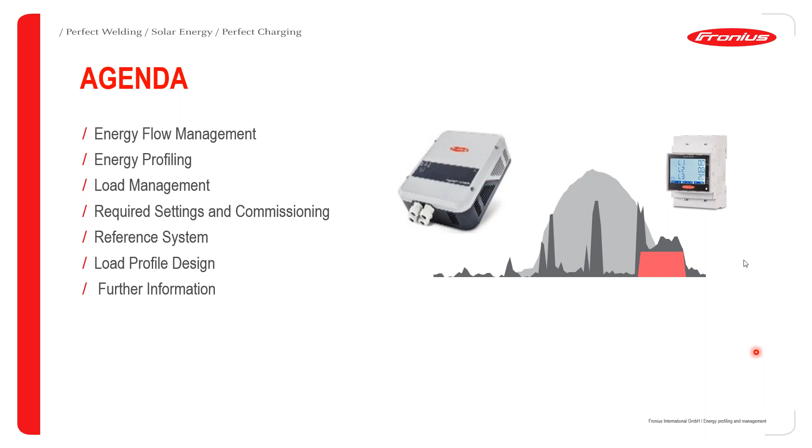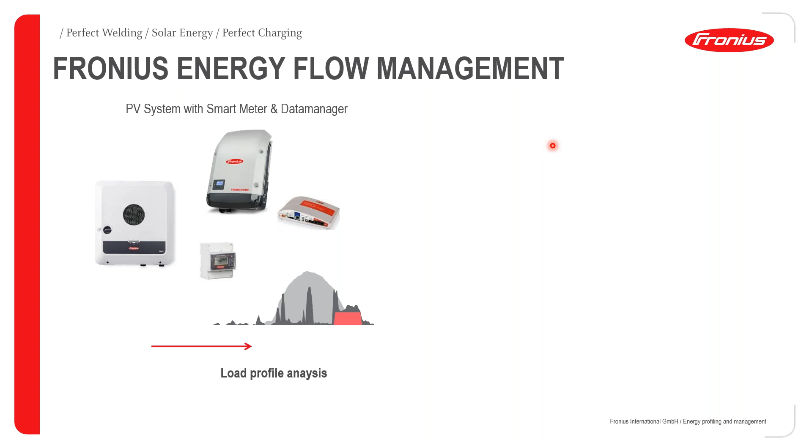Let's get started and look at energy flow management. So from the Fronius perspective, we start, of course, with a PV system that has a smart meter and a data manager, because these are the key requirements for you to be able to do load profile analysis. So the next step would be, of course, to be able to control heavy loads that might be connected or consuming energy in your system. And therefore, we go into the area of load management.

And after that, we also advance into an area whereby not only managing these loads, but also storing a bit of the energy for later use. And this storage can either be in the form of a battery storage or in the form of hot water. So the hot water and the battery storage are, of course, sections that can be covered entirely in different trainings. But for hot water, we go through the Ohmpilot. And for battery storage, at the moment, we are working in conjunction with BYD HVS, HVM batteries, as well as the Fronius GEN24 Plus hybrid inverter.

So therefore, this gives us an illustration of how this Fronius energy flow management can happen, starting with your generation, and then you go on to Solar.web and analyze how the energy flow is happening with your system, and therefore looking at load management and saving of energy, how this therefore can be optimized.

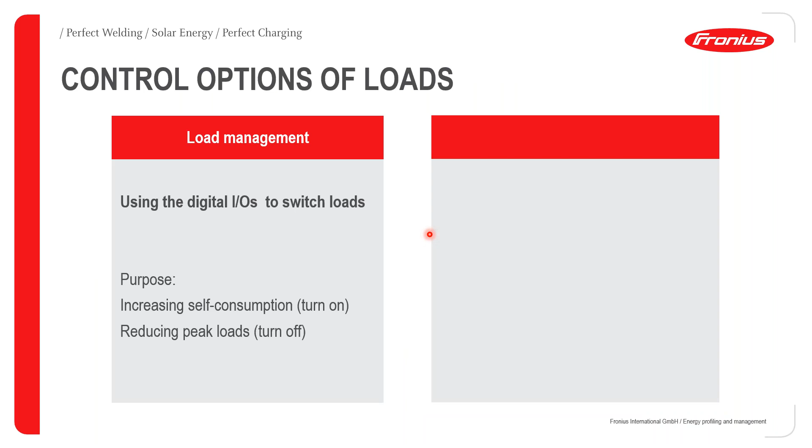In terms of the control options for the various loads, we have two possibilities. So we have one that is geared purely towards load management, and this can be achieved using the digital IOs to switch on the loads. And the key target here would be to increase the self-consumption level, and therefore you turn on this load, or you reduce the peak loads by turning off some specific loads that would cause your energy or power consumption to peak unnecessarily at some point.

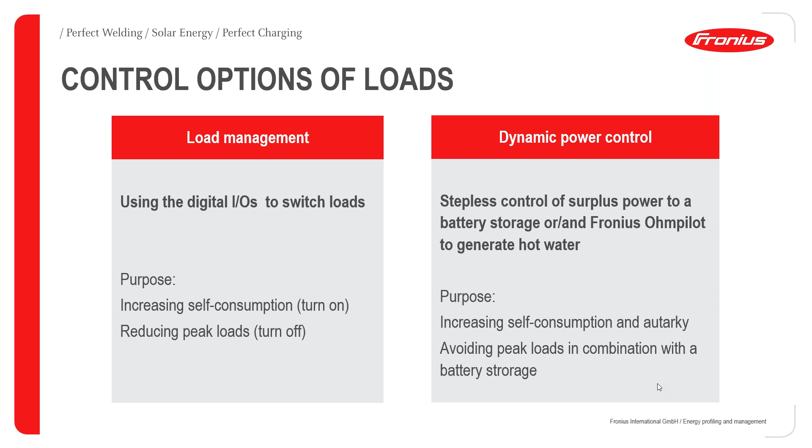The other alternative for control would be the dynamic power control. And a good example here would be the stepless control of surplus power, maybe for storage in a battery system or for storage in hot water using the Fronius Ohmpilot. And therefore, the key target here would be to increase the self-consumption as well as the self-sufficiency level by also avoiding peak loads in combination with your battery storage. And Cyprian is going to be covering how to avoid peak loads in combination with the battery storage later.

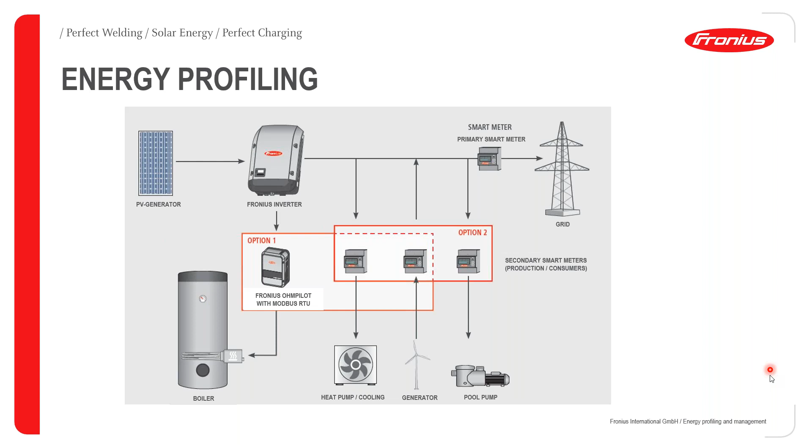It could be also that you want to monitor something like a pool pump and look at exactly how this pool pump is utilizing energy within your setup. And therefore, this gives us now the possibility to do very precise energy profiling of the various loads and appliances that are connected to this setup.

However, there are some restrictions in terms of the total number of smart meters that can be used in one system. And the major restriction here comes in the form of the Modbus addresses that are available with the concerned inverter. So the number of feasible smart meters, where we have said it's possible to have a maximum of 4, has a stronger restriction with the Fronius Symo Hybrid as well as the Fronius GEN24 Plus inverters, because these inverters, if they are used together with a battery system, must reserve at least one Modbus address for use with the battery storage.

And then, of course, if you bring the Ohmpilot into the picture and you're connecting the Ohmpilot using Modbus RTU, then Modbus will also take up one address, as you have seen in the previous example. And therefore, the maximum number of Fronius smart meters is going to be limited to a maximum of 3, including the primary smart meter and the Modbus channel for the Ohmpilot.

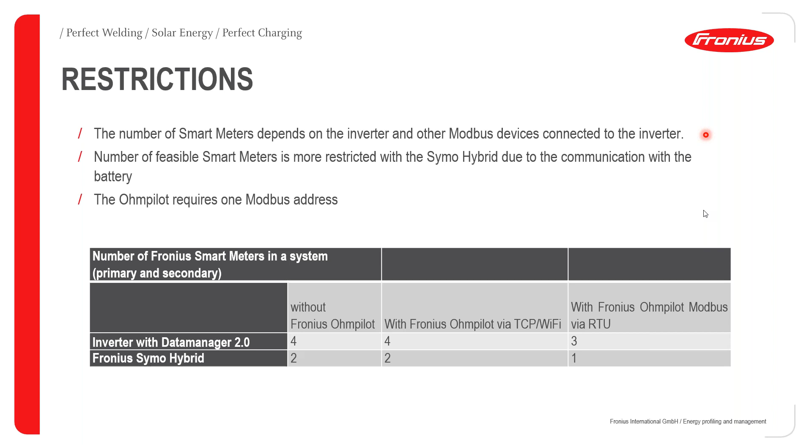When all these have been added, then you can also see a list within the web user interface of the Datamanager. And this is going to tell you what each of these smart meters is doing and also the location of the smart meter.

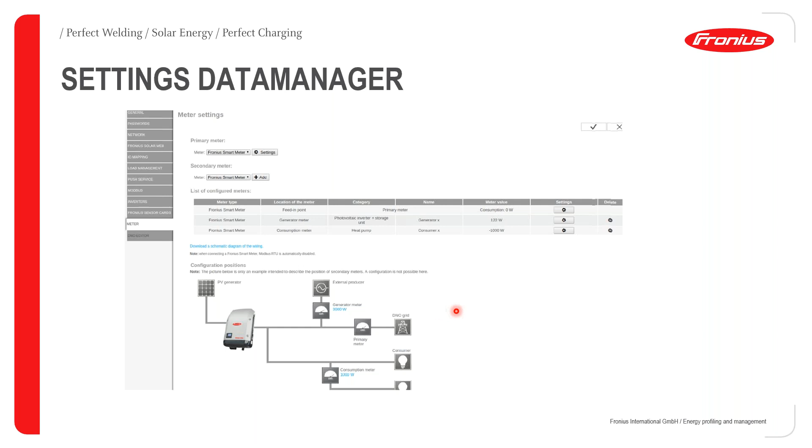In terms of the visualization and how the setup would look in Fronius SOLAR.WEB, for every smart meter that has been added, every one of those smart meters is going to appear in SOLAR.WEB under the energy meters category. So you basically access this by going to your system in SOLAR.WEB, then go to settings, and then access the components submenu. And from this components submenu, you can access the data source IDs for that particular system.

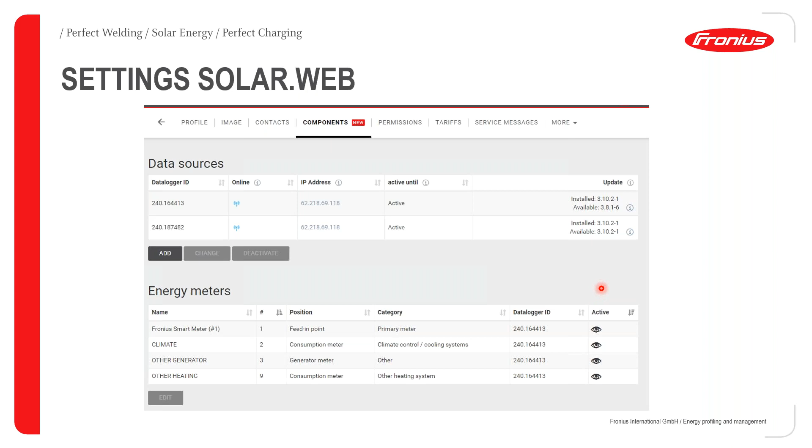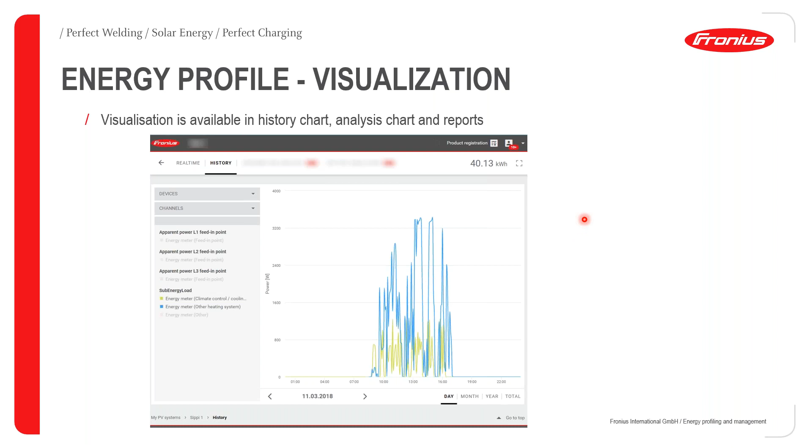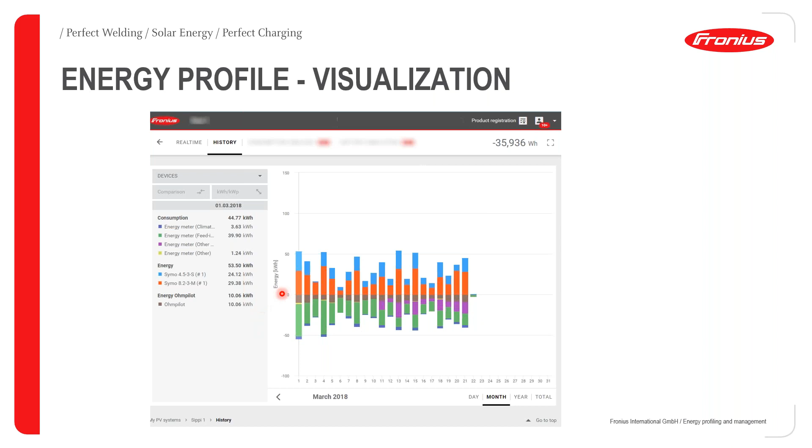So in terms of load management, this is also critical to understand how Fronius inverters enable you to do this. We are starting, of course, with an inverter that has the capability to control what we refer to as the digital IOs. And the digital IOs are then working in conjunction with an external relay to switch on or off a load depending on some predetermined thresholds.

So one of the key things that you might want to do with the load profile analysis is peak load management. In this case, with the communication from the smart meter, because the smart meter keeps an eye on the overall consumption in your setup, you're able to manage your peak loads. And these peak loads are going to be managed, as we said before, by allowing the digital IO from the inverter to switch on or off a particular load connected to it, depending on the available energy within the setup. For instance, if you want to avoid drawing too much power at some specific periods of the day, whereby you could also be incurring extra charges depending on the peak loads.

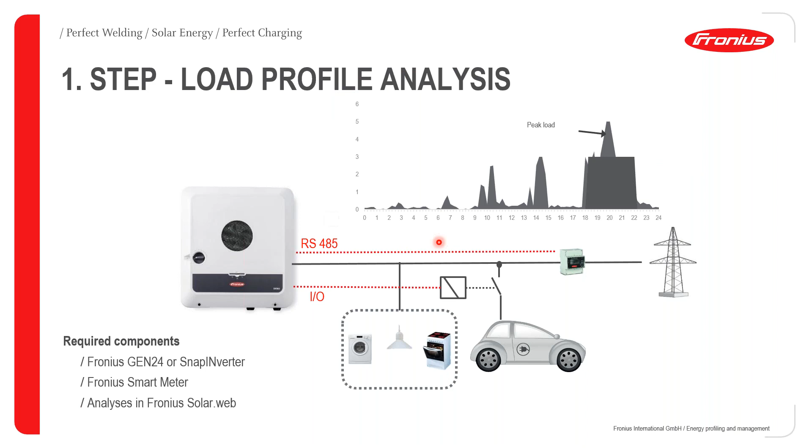So therefore, the required components for you to be able to achieve a proper load profile analysis and load management would be a Fronius inverter, which could be a Fronius GEN24 Plus inverter or a SnapINverter, a Fronius Smart Meter as well, and then you have the capability to access the data for analysis within Fronius SOLAR.WEB.

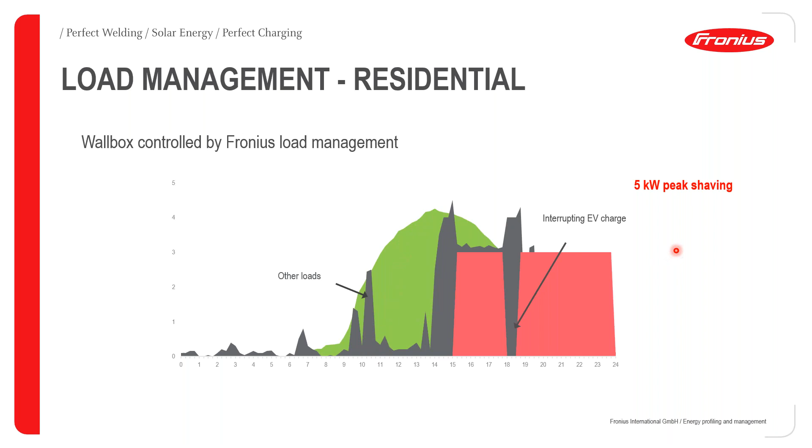So the way we achieve this is that anytime we are going to approach a consumption of 50 kilowatts in combination with the other existing appliances that are consuming, then through the Fronius load management output, we have the possibility to either reduce this consumption or switch it off completely so that we do not exceed this limit of 50 kilowatts.

And this could also be very useful if you do not want to change the existing infrastructure as far as wiring and the control gear within the setup are concerned. So you can have a very intelligent way of knowing that I have a control gear that can trip at maybe 50 kilowatts or thereabout. And if I see the potential for my load consumption to be anywhere near 50 kilowatts, then using the Fronius load management outputs, you can easily get rid of such a problem by either reducing the consumption of that particular load or switching it off completely.

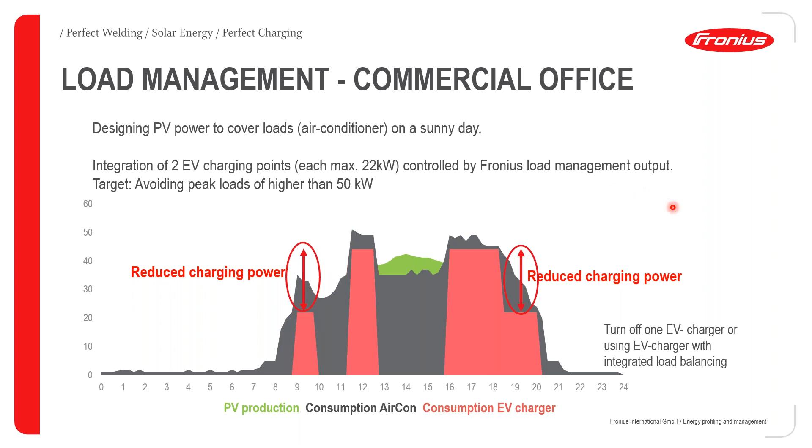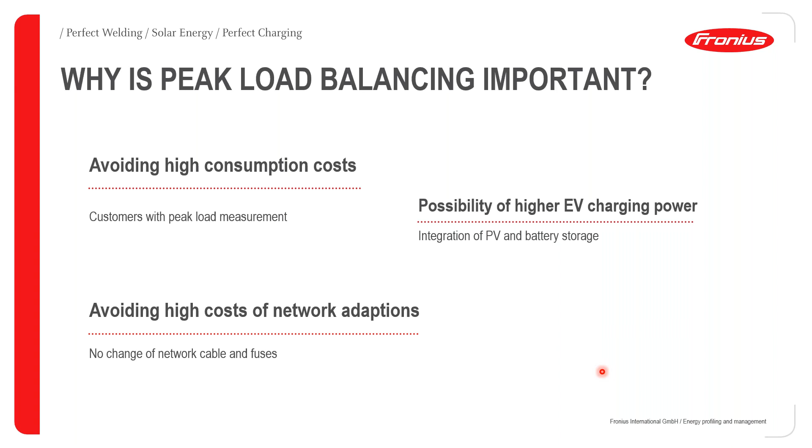Another important point is the possibility of higher EV charging power for those who are going to start enjoying electric vehicles. In other parts of the world, this is already a common thing. So integration of PV and battery storage is going to guarantee you even higher EV charging power capabilities in conjunction with load management options within the Fronius inverter setup. And therefore, in a nutshell, this is what we refer to within Fronius as the energy flow management of the Fronius inverter.

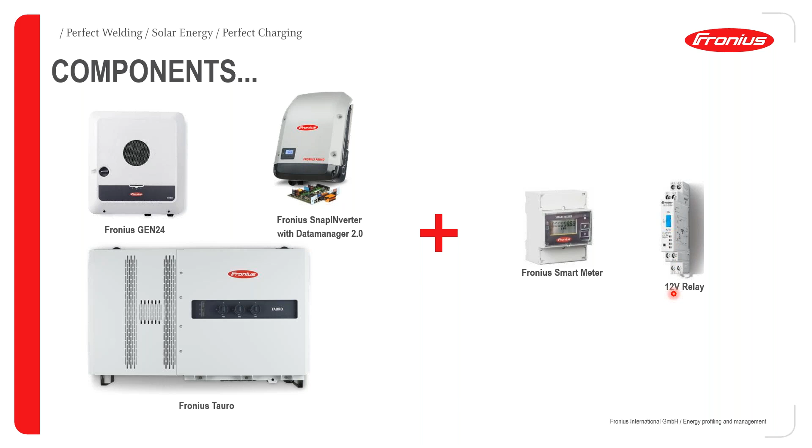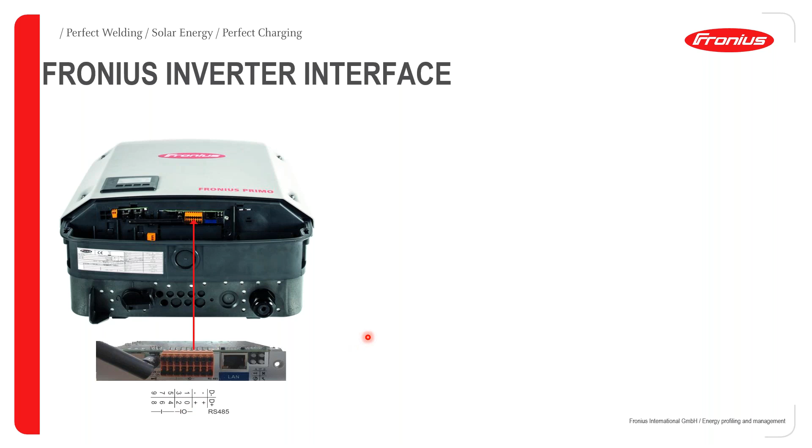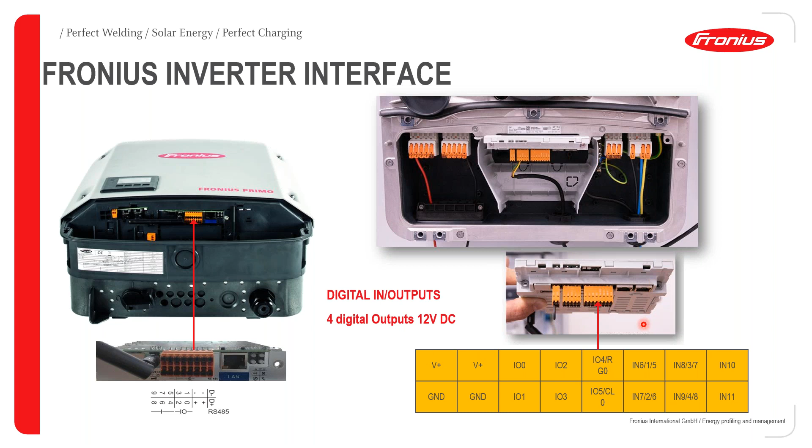Good. So taking a closer view for the Snapinverter, this is how it looks, just underneath the inverter. A closer look at it would reveal the input-output ports. So there are 4 usable input-output ports, and these input-output ports can be configured as output ports. So they are input-output port 0 to 3, that is 0, 1, 2, and 3. Okay, so a look at the Gen 24 Plus inverter. Same here, we have 4 input-output ports, 0 to 3, that is 0, 1, 2, and 3, just like the Snapinverter.

Next up, we take a look at how you can do the mapping, because if you don't do the mapping on your web interface, it's not going to be integrated to the hardware of the inverter. So this is on the web user interface, this is where you can actually do the mapping of the input-output ports you're going to use. So here you can select the input-output port terminal that you want to use for a particular purpose. And then once you select it, please ensure that you click on this tick mark, because without ticking it, it's not going to save.

So once you tick it, it will automatically save your settings on the input-output mapping. So please don't forget this particular instruction. And then after the input-output mapping is done, like I told you, we have 4 of them. So you can program each of them for different purposes. You can say program input-output 0 to control your air conditioner, input-output 1 to control your water pump, and the likes.

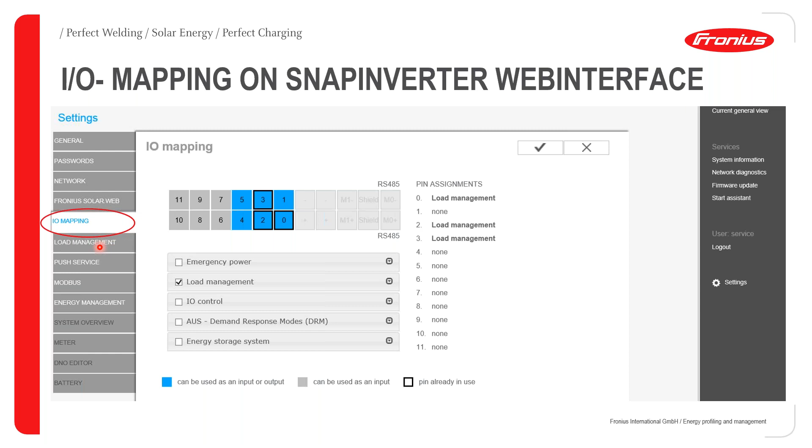So that's basically it. And of course, the provision is made for you to tag them by the name of the component or appliance that you want to control. So after this is done, you will now go to load management. We'll be seeing that in the next slide, as you can see. So here is where you include or set the conditions that should be met for these appliances to either come on or go off.

And before I continue, this is also to tell us that it is possible to set the priorities of how you can manage your surplus energy. From this example, load management IOs has been set on the highest priority, which is priority 1, followed by the battery, and then the Ohmpilot. So what this means is that once you start generating more than you're consuming, meaning that you have surplus, it is going to give more preference to load management IOs, meaning that it is going to trigger the heavy loads that you have already pre-configured first of all.

And then if there is enough surplus energy to take on the next priority, then it will bring in the battery. Otherwise, it will ensure that the cycle of the load management is complete, meaning that it has gone through its control cycle before the next priority can be triggered, and then continuously till the lowest priority. So it now behoves on the design engineer or the client to determine which of these energy management priorities would be more important, and put them in order of preference.

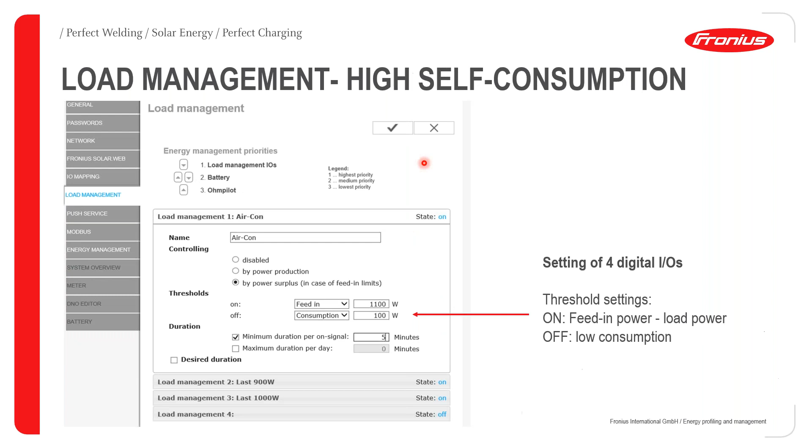Great. So this was for achieving high self-consumption. Now this is load management function to achieve peak load balancing. So it is slightly different from the previous setting. So what we should be targeting here is, of course, you can set the figure that a surplus needs to meet before it turns on.

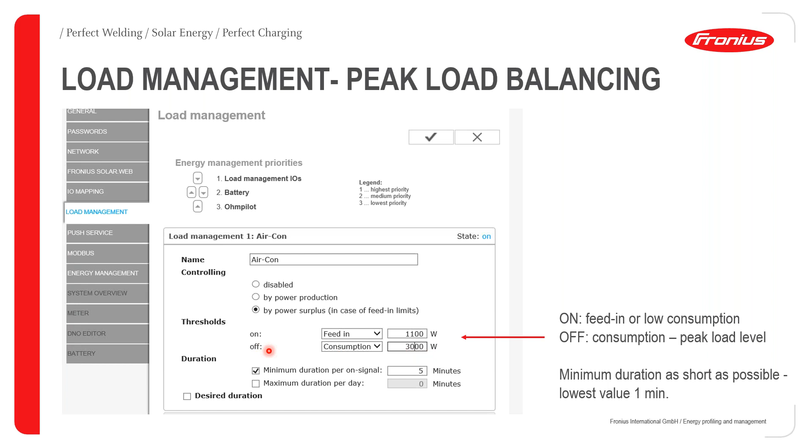So once that is done, you would now have to set the figure that your consumption must not exceed. So if you set 3,000 or 3 kilowatts in this case, it means that once your consumption hits 3 kilowatts, it is going to turn off. So that's basically what this setting is all about. Of course, these are for setting for Snap inverters.

And for Gen24 and Tauro inverters, of course, this can be achieved by using the Solar.start app, which is available and downloadable on our app stores. Here, once you get into the pin, the load management pin configuration, you can now have access to the 4 input-output pins that you would have to configure to achieve your load management function.

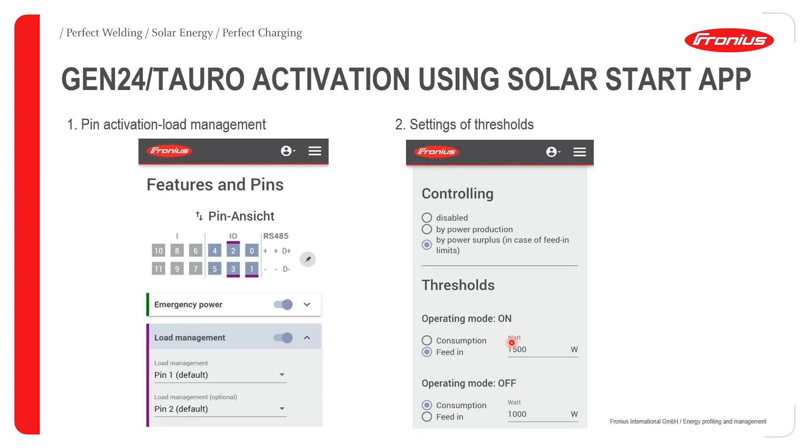And then setting of threshold, the same thing applies. In this case, you select by power surplus and then set the figures that would warrant triggering on and then triggering off, as you can see. Good. And then in this case, we're going to take an example of how peak load balancing actually occurs. We'll be using an example with an electric vehicle charging.

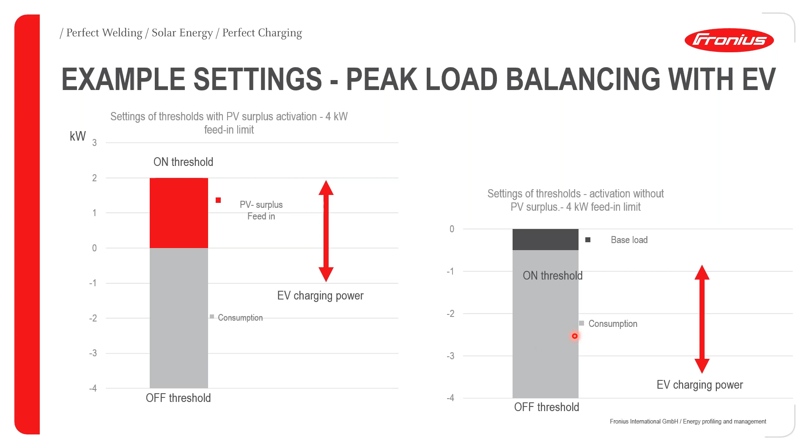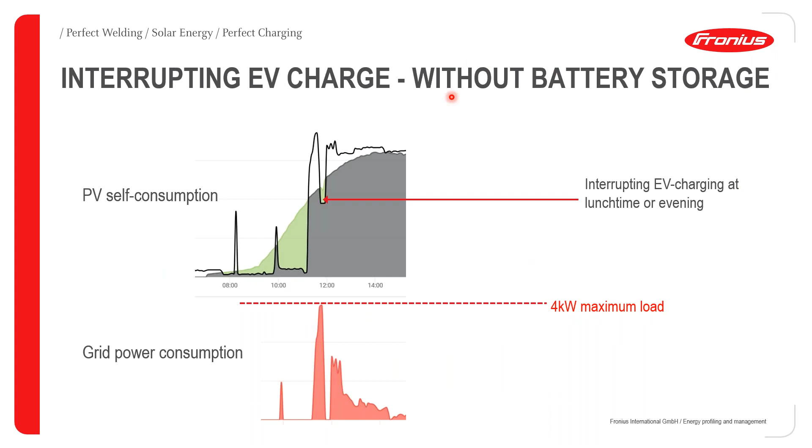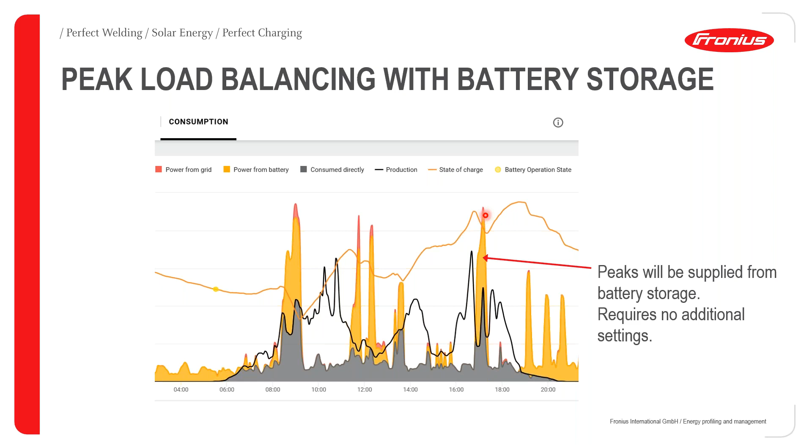Great. So with all this, we can of course say that Fronius comes with a lot of advantages when it comes to energy profiling and management, as it helps in avoiding high consumption costs for customers with peak load measurement. It also helps in avoiding high network adaptations, just like my colleague David mentioned earlier, because you don't need to add any network cables or fuses.

And of course, by the use of standard components, like the Fronius SnapINverter with the Datamanager, Gen24, Tauro, and the use of a smart meter and the 12 volt relay, you can actually achieve this. So the components to be used are not really complicated. And then, of course, you always enjoy the Fronius support hotline for cases where you have questions and inquiries.

Great. So having said that, we're going to go through a typical load profile design, where we're going to size an entire system by taking note of the load profile of the client or the consumer per se. So in order to achieve this, 4 points or specifications need to be taken into consideration. These are the energy consumption during the day, energy consumption at night, peak load current, and then of course, average load current.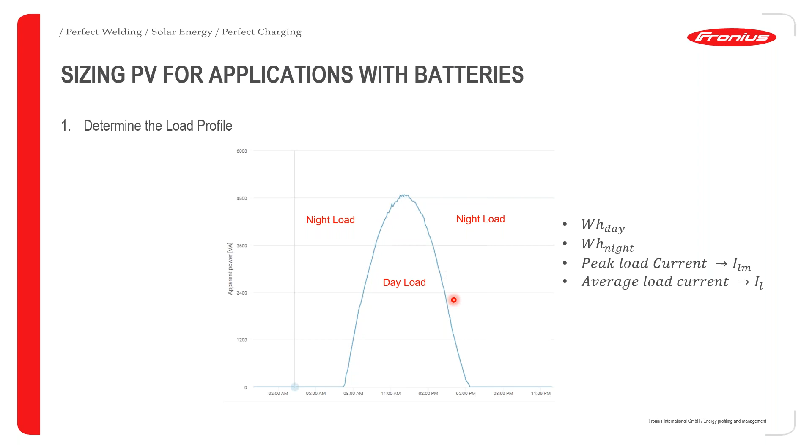Now we're going to calculate the daytime load. Daytime is basically the period of 6 a.m. to 6 p.m. If you take another step back, we can see that daytime is actually the period when the PV generator is functioning, and night time is the period before and after that. So let's now continue with the slide. As you can see from this timestamp, the energy consumed during the day is going to be 1 kilowatt, which is the average power, multiplied by 12.

That is 6 a.m. to 6 p.m. So this is the time. So 1 by 12. And then for load 2, which is 1.5 kilowatts, it is going to be multiplied by 1 because it occurs just one time between 6 a.m. to 6 p.m. And then for the third load category, which is the motor, it occurs 1, 2, 3, 4, so 4 times. But in this case, it runs for 20 minutes. The SI unit for time in this calculation is hours, which means we'll have to divide 20 by 60 to give us the time in hours. And by the time we do this calculation, we'll be arriving at 16.2 kilowatt hours.

And then nighttime load, this is basically the period between 6 p.m. to 6 a.m., which covers an entire period of 12 hours. So nighttime energy consumption will be 1 by 12, 1.5 by 2, following the period in question. And then in this case, 2 kilowatts multiplied by 20 minutes over 60, and then multiplied by the frequency of occurrence, which is 4 in this case. So here we're going to arrive at 17.7 kilowatt hours. So now we have energy consumed during the day and energy consumed during the night.

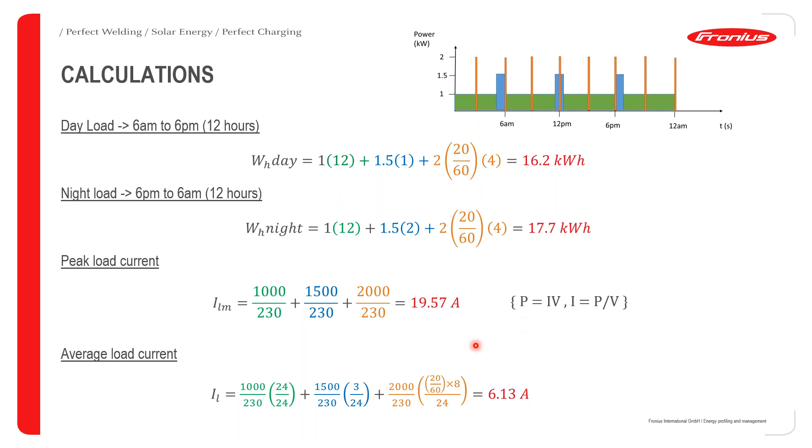Great. Now, after that, how can you determine the number of panels that you would need, and of course the size of the inverter? That's actually easy to obtain as long as you know the wattage of the panels, the efficiency figure for the panels, and of course the dimensions. Once you do that, you would have to obtain the irradiation figure. In this case, we took the irradiation figure for Joburg, which is 5.2 kilowatt hours per square meter per day. And then you can obtain the entire area of panels needed by dividing the energy consumption per day by the efficiency of the panel multiplied by the irradiance per day for the location.

Great. So if we go back to the previous slide, we will see that the energy consumption during the day is 16.2 kilowatt hours. So this will be divided by the efficiency. The efficiency is 21%, which is the same thing as 0.21, multiplied by 5.2 kilowatt hours, as you can see. We're going to get 14.8 square meters. So this represents the entire area that is going to be covered by these 400 watt panels.

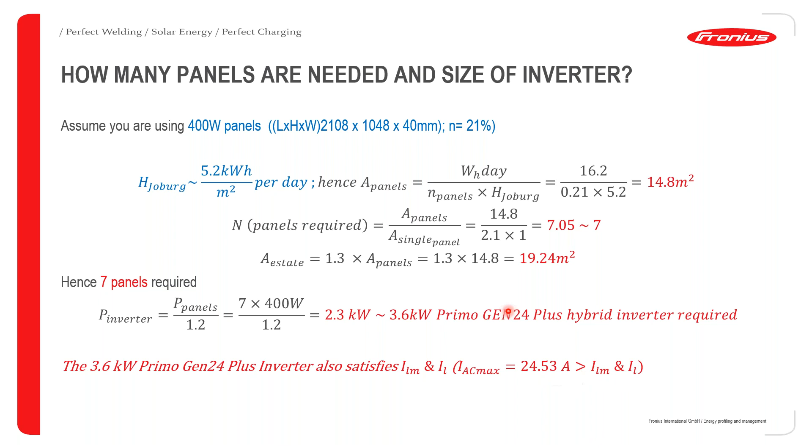So we'll be selecting the 3.6 Primo Gen24 Plus inverter for this particular design. In summary, we'll be going for a 3.6 Primo Gen24 Plus inverter because its maximum current is greater than the peak load current and the average load current. So I believe this is understood by all.

Having obtained the capacity of the inverter, let's now go for the size of the battery storage. It can be gotten by dividing the energy consumption at night by the efficiency of the battery. The efficiency of the BYD battery has been given at 96%, which is a very good percentage. The energy consumption at night time, if we recall, is 17.7 kilowatt hours. Dividing this by 0.96, we obtain an 18.4 kilowatt hour battery storage size.

But if we go through the datasheet I've included here, you can see that there is no 18.4 kilowatt hour battery size. The closest size to it is 19.3. So we'll be going for a BYD HVM 19.3 kilowatt hour battery.

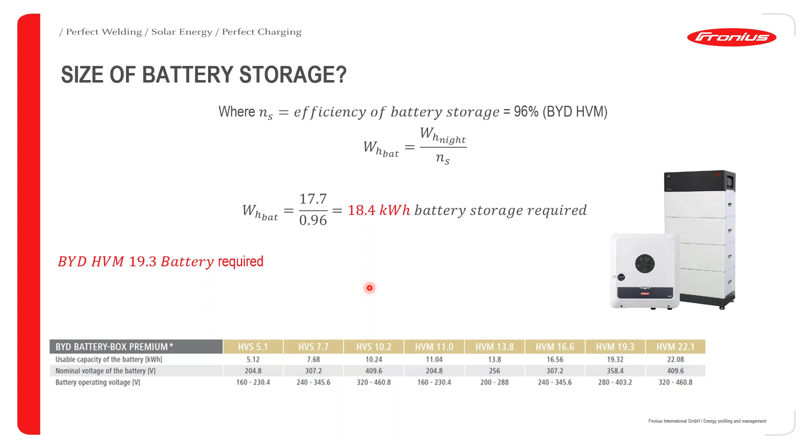So with the load profile that we've gotten, we have successfully calculated the system size, the number of panels, the area to be covered, the inverter capacity, and the battery capacity. For now, Fronius is only compatible with the BYD HVM and HVS batteries, and we will update you once the information changes. So that brings us to the end of this profile calculation.